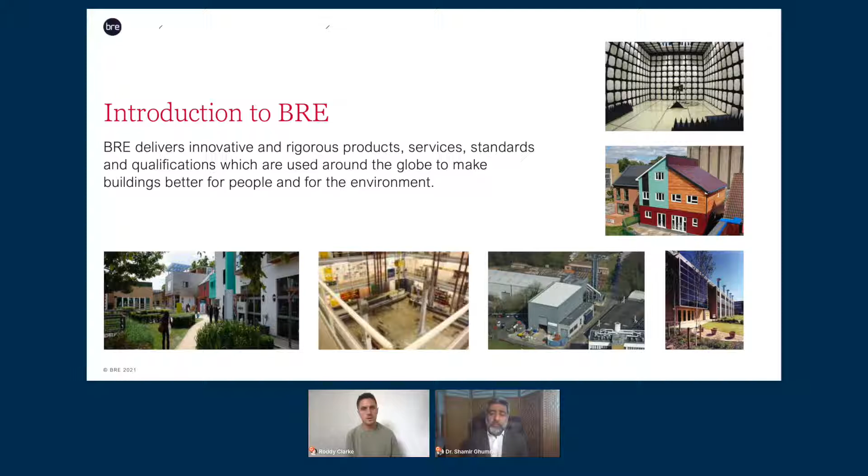I think it's that interconnectivity of a whole range of sustainability issues that's given BREEAM the strength, the recognition, and the adoption that we see around the world, both for new construction and increasingly for the new existing building schemes that we operate as well. But a bit more about that later.

I really want to touch upon two key themes that I think are vital for us to understand as we unpack this conversation: the aspect of time and the essence that clearly we are running out of it. And therefore, the closer we get to some of these milestone dates - 2030, 2040, 2050, or whatever it might be - actually that sense of urgency really starts to dawn.

And nor do we want to panic in a sense that we want to create a lot of anxiety, but actually we need to channel that energy and that desire for change and transformation in the built environment in such a way that actually it gives us more confidence, belief that actually these goals are achievable and we have the right tools at our disposal today.

But perhaps what we do need is scale. Wider adoption of some of the things I'm sure you'll hear about from some of the other speakers, fantastic examples of circularity, innovation around products and what those can achieve. So we're blessed with so much talent in our industry, but now is the time to really mobilize that and scale, to adopt, to change the way we procure things, to change the way we do things and think about these things in a different way, because fundamentally the road is getting shorter, unfortunately, and therefore our sense of action is ever going to become more and more acute.

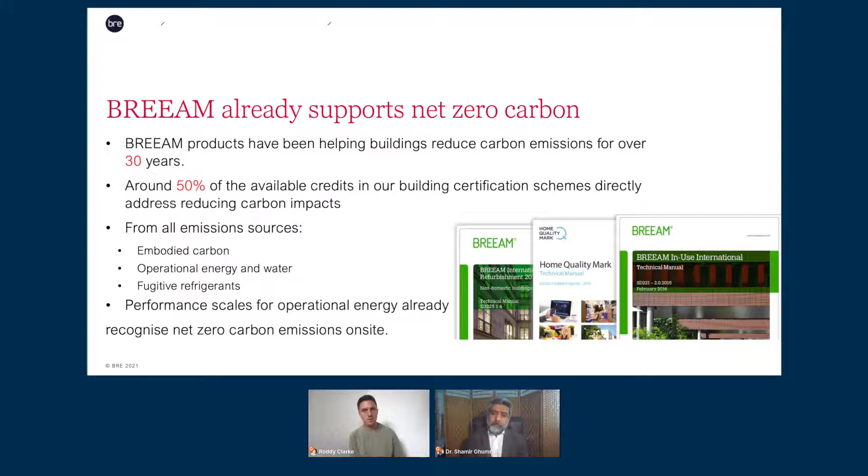So we've got, hopefully I've painted a bit of a landscape there for everybody to really show that actually there's a huge opportunity that lies ahead of us, lots of tools and systems that exist. But I do think absolutely it's important that we understand, raise our carbon literacy, I would suggest, and therefore be able to utilize data, look at the time horizons that we've got to work with, and really make some of these more strategic decisions today.

I think it's absolutely fundamental for us to make sure we achieve these global goals that we have no choice but to absolutely deliver on.

So Roddy, back to you. Thank you very much, that's really interesting, and it's good to see the role that schemes such as BREEAM can play in helping the shift towards a climate conscious future. I think the specifics of the certification, how it takes into account each component that goes into a project, is really interesting. Just maybe give us a quick insight - you speak about time and the urgency of time - what do you think, in your view, are the biggest obstacles in reaching these targets?

Yeah, and I think it's a challenge, isn't it? We've got some great examples of leadership with organisations, some which you'll hear about today, making massive strides around setting ambitious goals, not waiting for 2050. I think the hesitancy in trying to push things out further and further creates a lag, creates apathy in some cases where actually, well, we've got time. Maybe 28 years for some is a long time, but actually in the time that remains ahead of us to make significant change, we need organisations to be more ambitious, to bring these dates forward, to talk about 2030, 2040, particularly because by the time we get to these milestone points and evaluate what we've done, if our realization is that the gap still remains too big, our opportunities for intervention will get incredibly small, and that's the challenge.

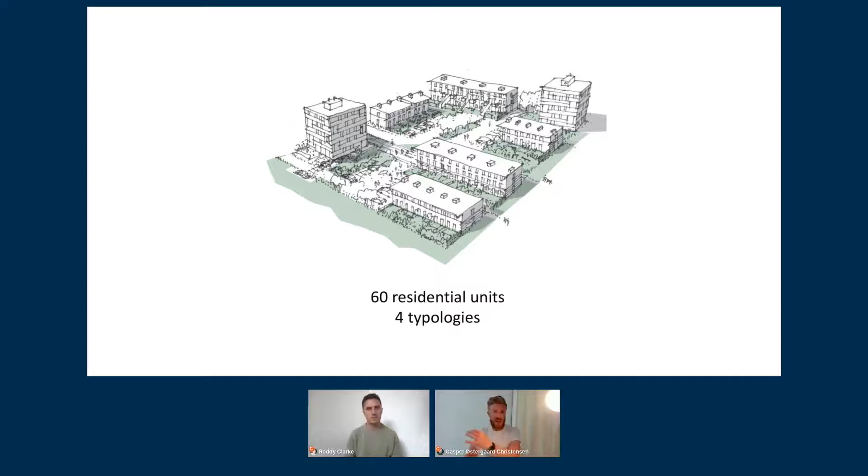The project we have designed is a social housing project with 60 housing units, split over 4 different typologies to show variety and flexibility in the building system — so it's not just one type of housing, but multiple. It's built in concrete, which in itself is not very close to zero carbon, but we can't avoid using it, so we wanted to push that agenda as well.

Here's a very simple floor plan of one of the tower blocks you saw. The dark gray you see here is the concrete elements, and everything in light gray is made from a lighter material, for example wood. So it's much more flexible and changeable over the years.

Everything is assembled using reversible joints, so it can be taken apart and moved around as one sees fit. As you can see, if you were to remove all the light gray, you get a very flexible floor plan, but also a very flexible facade that you can change over the years to adapt to changing needs.

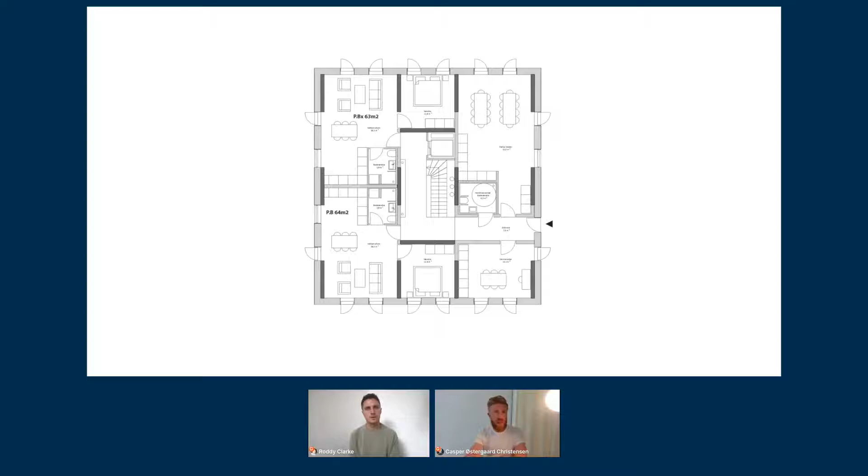That was one of the key points from our client here. Right now, they're spending a lot of resources adapting apartments from the 60s and 70s made in concrete to current needs, since people need larger apartments now than they did back then. So they see huge value in that. If we can avoid spending resources and reduce building waste by having more flexible apartments, that also lowers the carbon footprint of the total life cycle of the building.

We'll just flip through here. Here's the same footprint, but another set of apartments in the block — you can kind of see the building system, this repetition of concrete walls. And here we move to the row houses; it's the same building system, with a set of concrete walls that is then repeated only once.

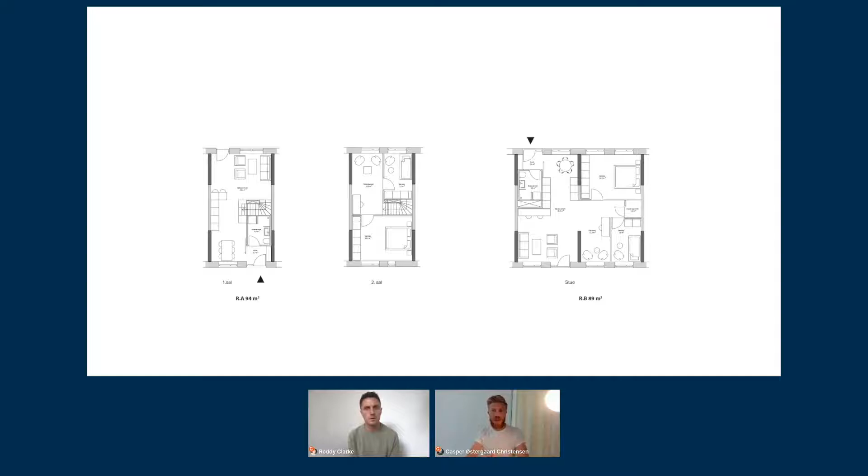The last typology is where you have 2 wide apartments next to each other, and then a row house on top. Again, it's the same building system, just a variety of it. That's also the thinking here: if we are to reuse the building materials as they are in the future, they need to be alike, and they don't need a lot of specific openings, windows, and all that. So it's very simple elements that you can use in multiple ways.

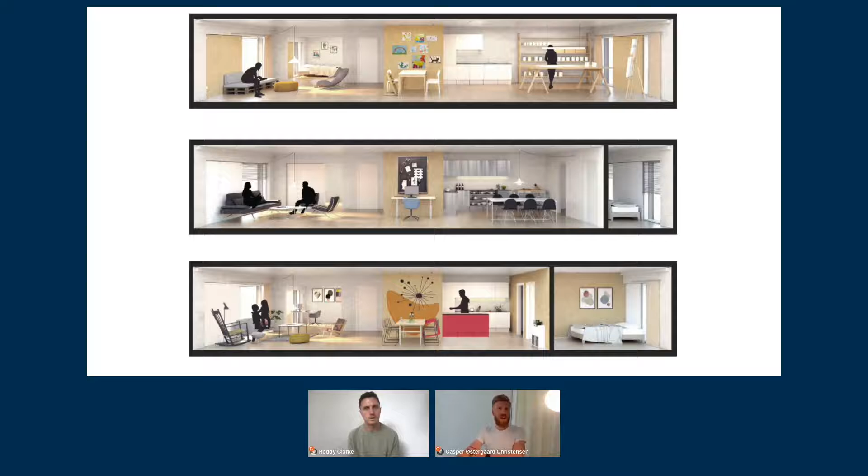Just to show how much you can do in terms of flexibility by only affecting the lighter elements — we have the same fixed concrete structure, but we're just using the lighter elements, the walls and surface materials, in different ways to create different layouts in the apartments.

Before actually building the whole project, we built this small demonstrator just outside the client's office — you can see it out the window here. Basically it's just one of the housing units, or one part of the building system, to give an impression of how it would look.

But then on top of that, we also just pumped it with a lot of different circular building materials to show off to the industry, to say, hey, it's actually possible to go out there right now and get some materials that you can use to have a circular building project. And yeah, that's also from the outside - we just clad it in a lot of different circular materials.

On the very colored one here, it's made from recycled consumer plastics that's made into facade. And on the back side, we have cork. And the design for this is simply a shingle facade.

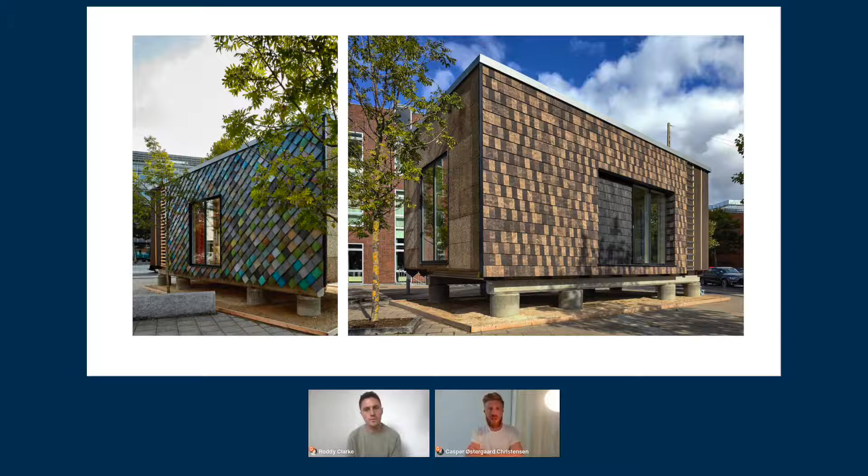So that's the Circle House project, just explained very quickly. And again, it's social housing, so it's a very low price. Right now, it's under construction, the larger project. So that's one of our lighthouse projects that's really paved the way for a lot of the work we're doing at the moment, which is some larger projects. But just getting something built and showing the industry that this is possible is a really good step, and also something to push the agenda. So I can really encourage people to just get something built, as an example.

Thank you, Casper. Yeah, that's really interesting, and it gives us such a great insight into the specific approach that you took for this project and how it is possible to bridge that gap. And as you said earlier, meaning for something to embark on a circular building project, it doesn't always have to be a cost implication. It can be about innovating around that.

And obviously in all of your projects, how do you monitor the carbon footprint of each project, of each product individually?

Often, yeah, we of course use specific programs like One Click LCA, or there's also a specific Danish program to monitor carbon footprint. And sometimes there's just some generic data. But what we really like is when we get EPDs, for example, where the manufacturer has been in and reviewing their own product and can give us some specific numbers on how this product affects it. And it is something that we're looking more and more into.

And of course, the more specific data we can get, the more right our calculations can be in the end, and the more we can predict the final outcome instead of just having generic data. So that's really one thing I would like to champion - that all the manufacturers, even though it can be expensive, get the EPDs and all the documentation done, because it really helps in our work to push this agenda.

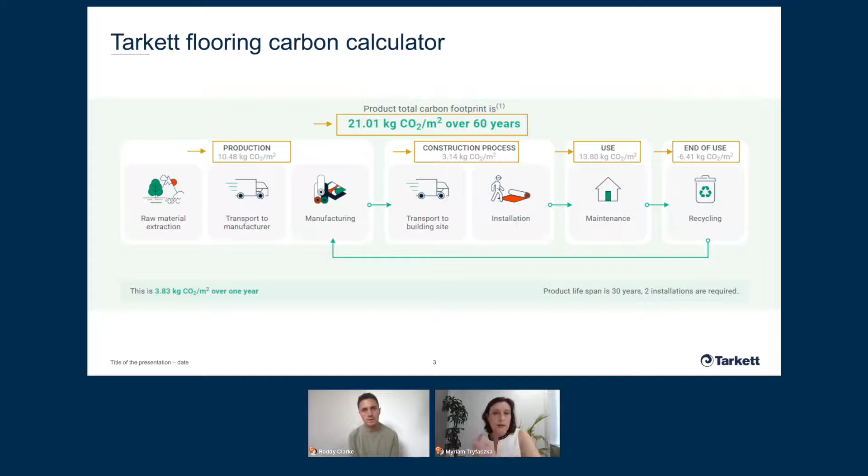But if we consider from the beginning that the material will be recycled, then we reduce considerably the carbon footprint of the material. And that's what we want to show our customers, because we believe that if we want to onboard our customers in the journey towards circularity, we need to give them concrete figures, concrete examples - here they understand the carbon footprint is 21 kilograms of CO2 per square meter over 60 years.

Of course, what does it really represent? What we have done is calculate the equivalent of those tons of CO2 avoided in something more concrete - we choose numbers of flights, equivalent of trees keeping carbon - and that should help our customers have some references on what really brings a positive impact when choosing the carbon calculator.

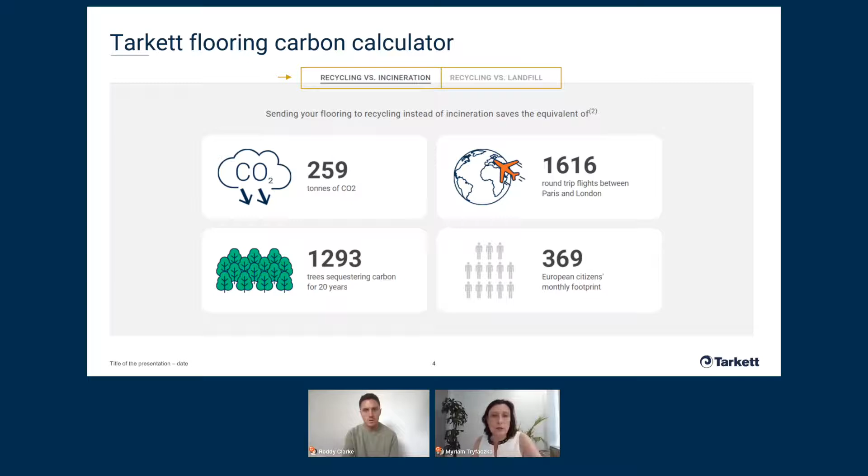Amazing. And again, this is what I mentioned earlier about taking accountability, and you really are taking accountability and making it easy for customers to invest in products where the data is there.

And I think also you mentioned it briefly earlier about the Restart program. That would be really interesting to hear about as well, and how you've salvaged tiles from construction sites around the globe.

Yes. So I will not describe the full detail, but let's go immediately into a true story and what we can deliver to our customers today. So a few years ago, we developed the possibility to recycle post-use homogeneous flooring. This happens in our factory in Sweden, and it was natural to collaborate with a Swedish company at that time that was also really motivated by the circular economy.

And we did it with IKEA. So IKEA has been using Tarkett floors for many years in their stores, and we had the first experience with IKEA in Kungens Kurva in Sweden. There we were able to recapture 10,000 square meters of used floor covering. They were brought back in our factory, where they were cleaned from the backing, the glue residues, reground into raw materials.

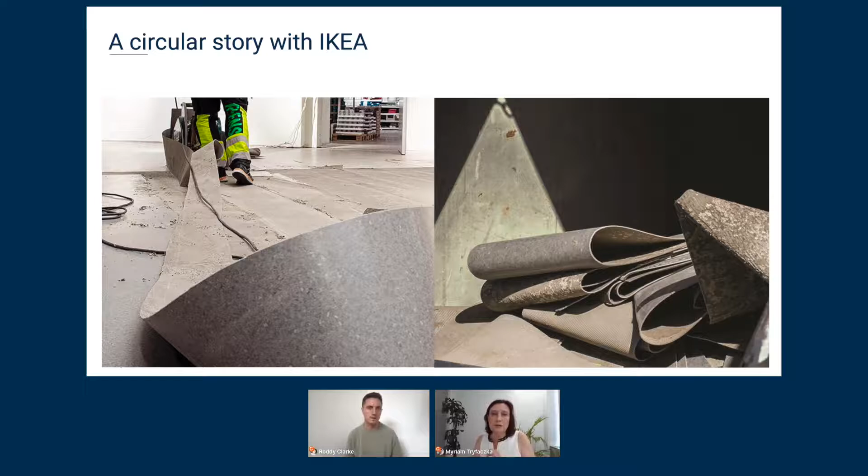And just to mention that restart in Europe is developed in 16 countries today, and it is in constant evolution and development. Brilliant. Thank you so much, Myriam.